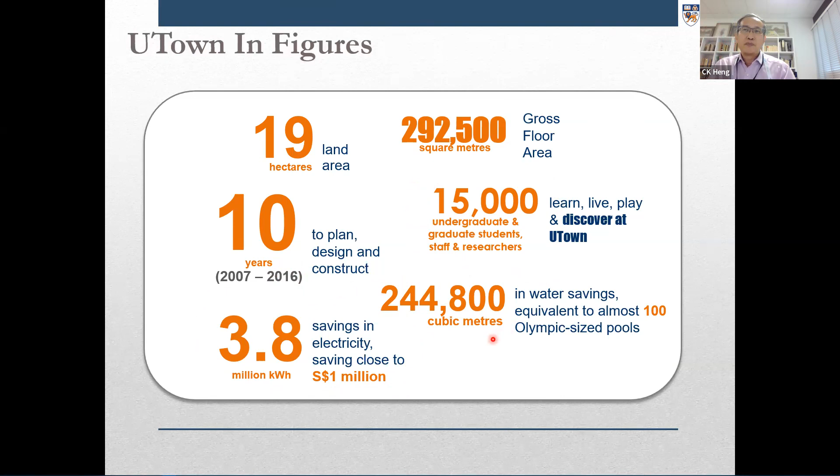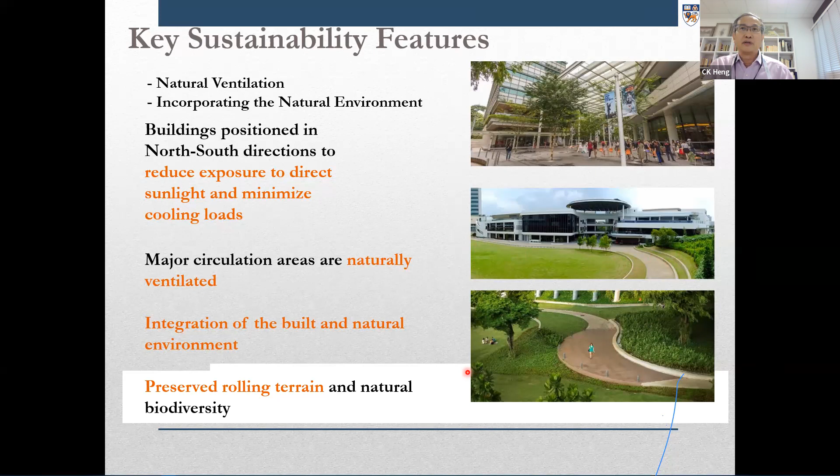So this is the EduSports building here. And we have meters within the residential district hostels here to encourage responsible behavior, such that we have this so-called pay-per-use scheme for air conditioning at the residential colleges.

Let me go back to the photos earlier so you know. All these here are residential colleges - they're hostels. This as well, they're all hostels. The high-rises are hostels, except for this one which is a research building. The rest of the high-rises are all hostels, and the aircon is on a pay-per-use system.

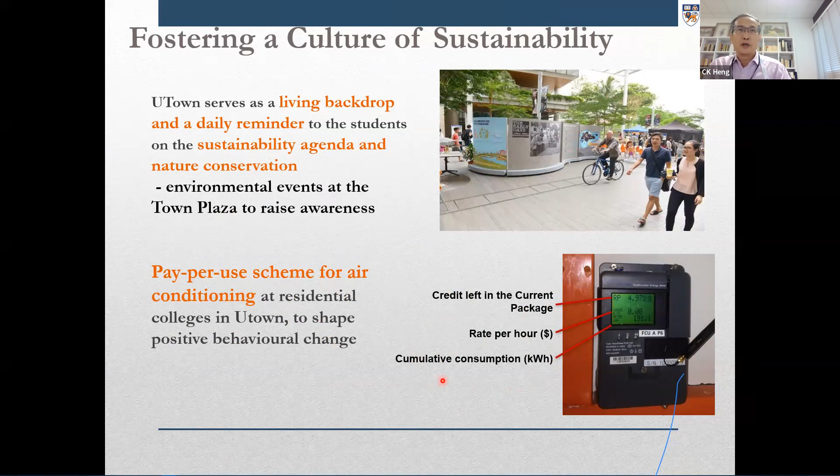So you have a meter that basically shows you the rate per hour and how much consumption has taken place. This is also to promote positive, responsible behavior.

For the entire campus, we are aiming to become a carbon neutral campus by 2030, and a cooler NUS. We intend to do it through energy management and efficiency, using as much renewable energy as possible - I'll show you how we do it later - and also through carbon sequestration and carbon offsets.

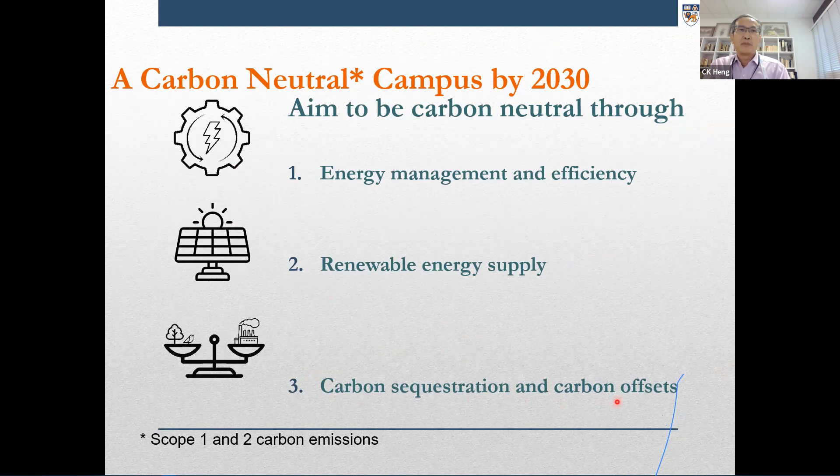What we hope to do is to cool NUS by 4 degrees by 2030. One way of doing it is to reduce solar gain, and again through SDE4 I'll show you how, and reduce heat load generated by the buildings and operations. We're going to plant a lot more trees on campus - right now we're trying to plant about 10,000 trees a year.

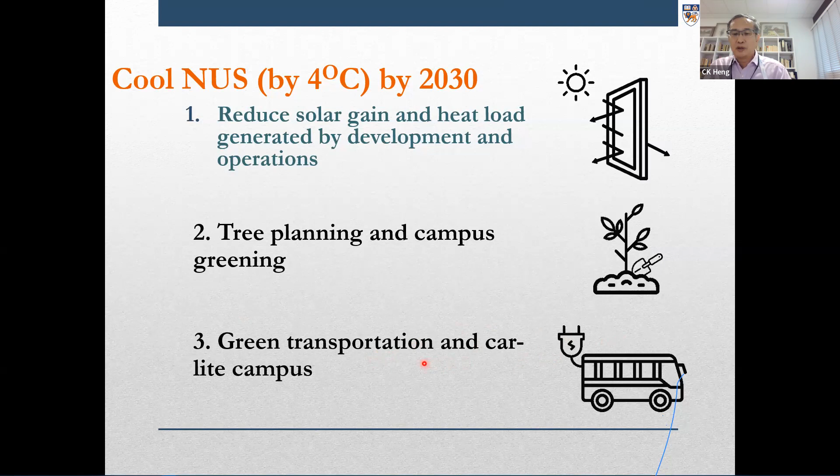For green transportation, right now we are transitioning all to electric buses, and also aiming for a car-light campus, one that doesn't have too many cars. In a nutshell, here are the different initiatives taken to become carbon neutral, to become a cooler NUS, and to have zero waste. I won't go into all of these except to highlight the topics - you can go over all this in the recording.

So we maximize renewable energy use with zero energy or super low energy buildings - I'll show you later what we've done through SDE4 and SDE3. We also have a smart campus ecosystem, with an integrated building management system, etc. A lot of this is to make sure we are carbon neutral. And of course we're also now working on a digital twin.

This is for basically environmental simulations and to optimize the operations of the university.

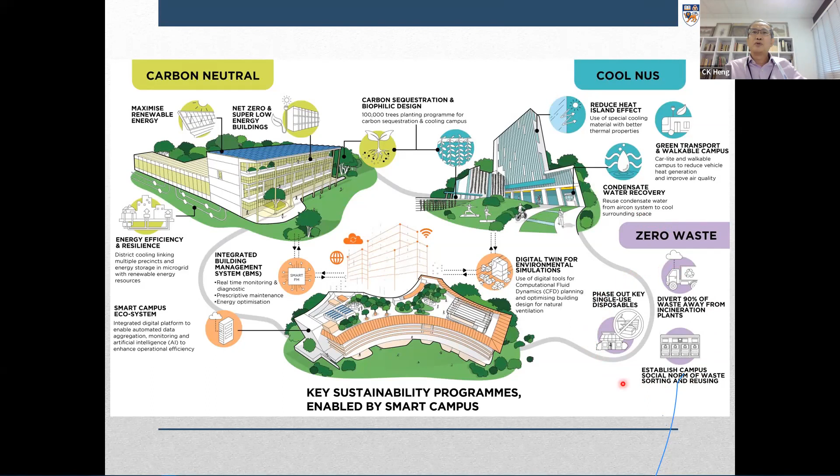We will be, as I said, planting a lot of trees to render NUS cooler and also to reduce the heat island effect. It will make the campus a lot more walkable and less traffic and transport needed. We recover the condensates and we also harvest rainwater. And then of course we do all the zero waste insofar as recycling is concerned. I won't go into this - let me move on to the next slide.

So this is one effort in what is the SDE 3 building, on the rooftop, an early experiment that my colleague conducted. As you can see here, what she did is basically 10 to 15 cm of this planting medium, which is dirt soil, over hydrocell. So there's a thin layer of hydrocell, and then she placed a layer of earth on top.

And just left it there. After a few months, things began to grow. After a couple of years, this is what it is, a stable state. It came to be a steady state where there are local plants, a lot of it because of bird droppings and all that, and it became a stable ecosystem, as you can see here. So these are photos I took on top of this rooftop of this very sustainable kind of greenery. So this greenery, although it looks a little bit wild, it's totally natural.

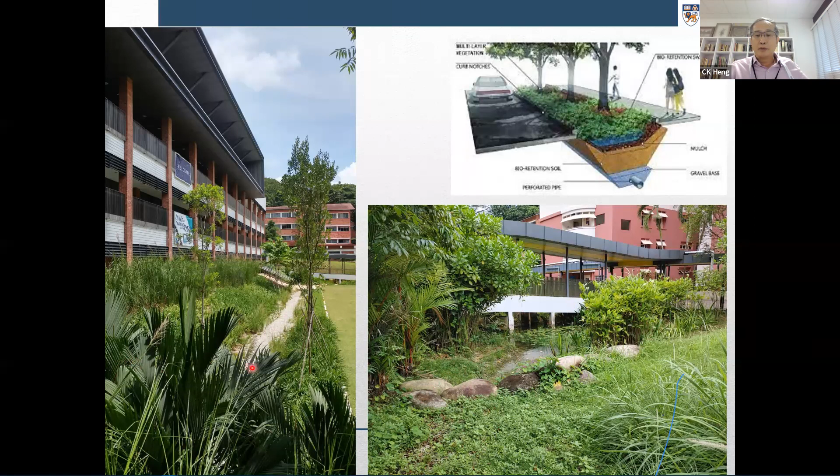So let me move on to the next one. Similarly, at the Yale NUS College, we harvest the rainwater. Again, we retain the terrain. You can see the terrain is a sloping terrain that's part of the U-town that I showed you earlier. And again, we harvest the rain, and it becomes both an aesthetic feature, but also a water resource for irrigation.

As you can see here, we also take good care of our trees. In this building here, instead of chopping down the tree, we conserve the tree, and the building actually avoids the tree, even though this is a rain tree, which is quite common. I won't go into the sustainable development goals here, but just to say that our NUS efforts are totally in line with it.

Next, please let me know if I go too fast. Next, I will talk about our SDE 4, our net zero energy building, which is part of this big agenda of making the campus more sustainable. The groundbreaking of the building was in November 2016, and it was completed in 2019. Let me show you.

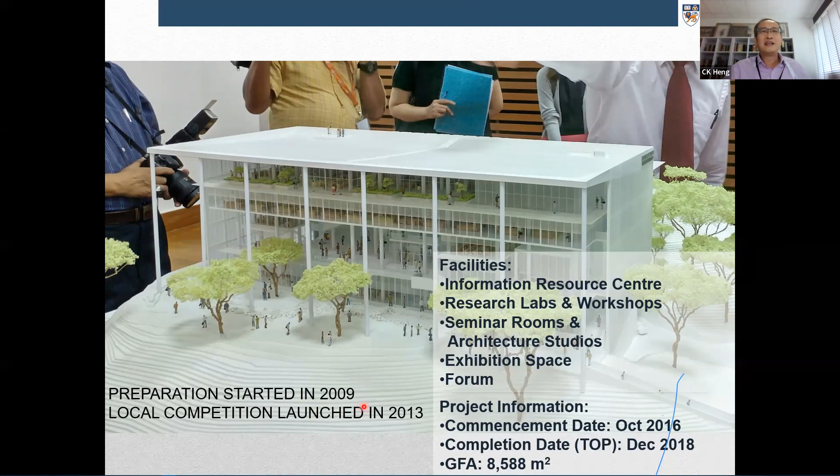I was then still the dean of the school. I put up the proposal, which was accepted by the president of the university, and then they told me to go and raise funding for the building. But if you remember well, 2007, 2008 was a financial crisis, and it was not easy to raise any funding during such a period. Finally, we went ahead to start the building in 2013 with university funding.

So it is the first purpose-built net zero energy building in Singapore, first through design, and then through operations.

And what we have achieved is not only technically a zero energy building, but I think the building is actually also very, very handsome. It's a very beautiful building. Like I said, it's an architecture of delight. So what we're trying to show here is that high performance buildings need not be ugly buildings. It can be biophilic, it can be zero energy, and it can be very comfortable and beautiful.

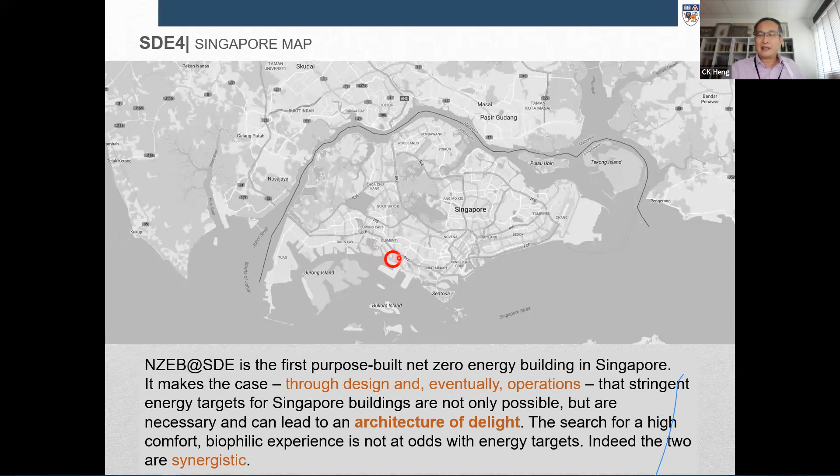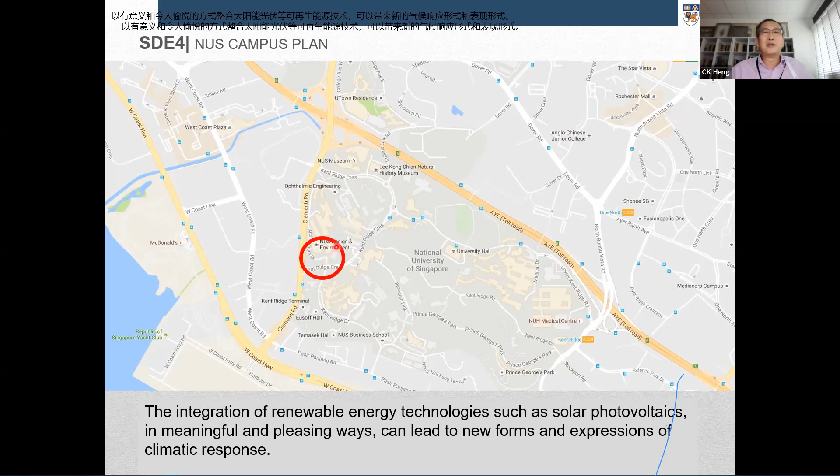I hope you can see the road here. There's a road that comes through here, makes a curve and goes up the slope there. So remember, there's actually this road that goes up, makes a curve, and goes north. So this is where it is. So the road comes in, makes a curve. This is a hill slope, makes a curve here, and hugs the slope and goes to the car park here.

As I mentioned earlier, in here there are design studios, labs, workshops, etc. So I wouldn't go into that. But it is important to see that it is going to be here, and the road that was here will have to be realigned. So what we did is this road, instead of hugging the slope, now goes up there and makes a bend, almost 90 degrees, and goes through these two buildings under a bridge between them. I'll show you later.

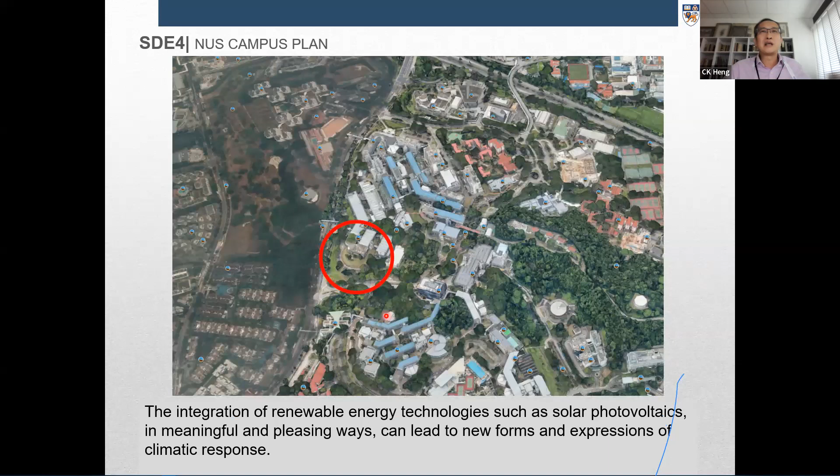And the reason I'm emphasizing this, as you can see in this Google Earth view, is that if you go closely and look at it, you see that this is the road that I was talking about. It actually goes up this slope, and this is rather a huge slope here, and there are a bunch of roadside trees. These trees are along the road, and if you see the next slide, you can see that the trees are still there.

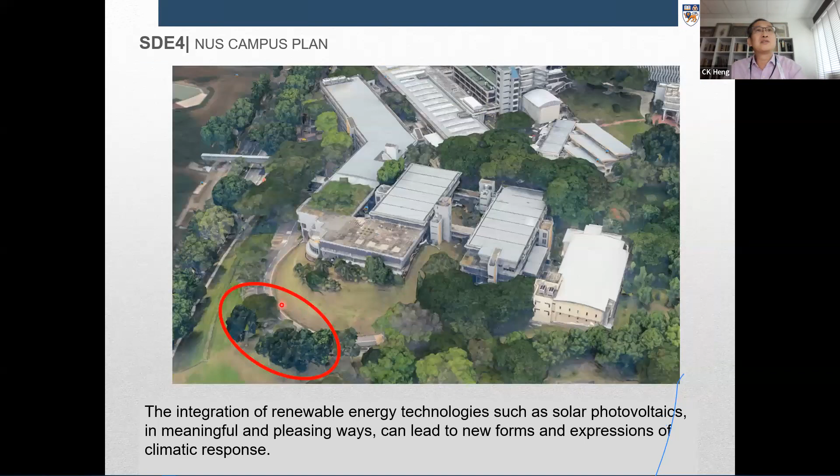Even the roadside tree, this one, which is essentially this tree here, is still there. We did not chop it down. This is another one there. So we kept practically all the trees. Maybe only one tree was removed, maybe this one, but this one was there. So in this entire exercise, we took very good care of the terrain, and we kept almost all the mature trees here.

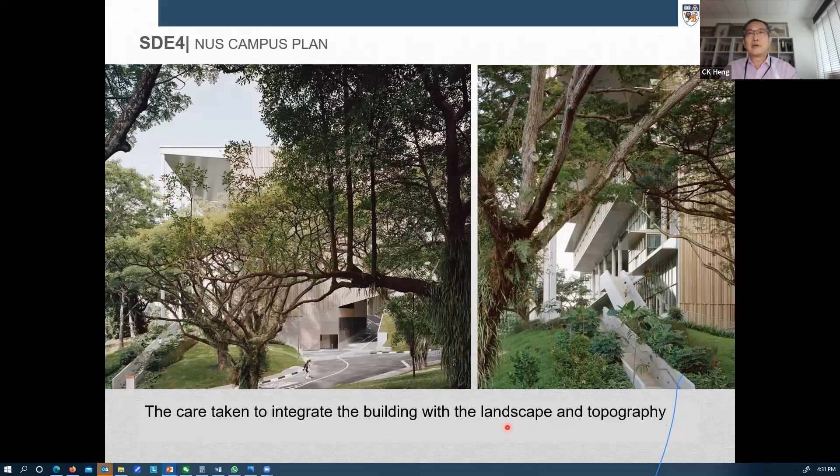We did not chop the trees. There is a lot of carbon sequestered in these trees, and also in the soil and in the roots of the trees, so we took a lot of pains not to destroy them. As I said, it integrates very well with the landscape and topography. So the whole process started with, first of all, a lot of study.

This is a site visit that I conducted with my team to some projects elsewhere, and it starts really with a design brief.

The design brief or program is really important. We spent almost 6 months working on it. We interviewed all our colleagues to understand what they need, worked out all the space requirements and the kind of electricity and load needed to run this building. So we advised them not to bring in refrigerators into the building from the start, and we calculated all the power needed to run this building.

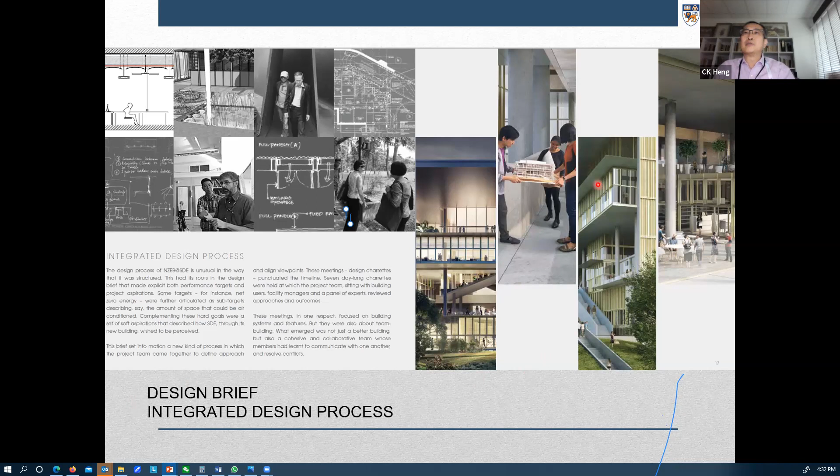So these are some shots of the building. I'll be showing you pictures of before and after. Before is all these renderings and perspectives done by our architect and the multidisciplinary team, and then I'll also show you the after, which is when it's built.

I think it's important to show that what we have done is a contemporary view of tropicality. We take climate responsive design to the next level. This building encapsulates all the principles of passive design strategies, the principles of traditional vernacular tropical architecture, but expressed in a new form. It also adopts an innovative solution to the question of thermal comfort, and I'll show you what that is.

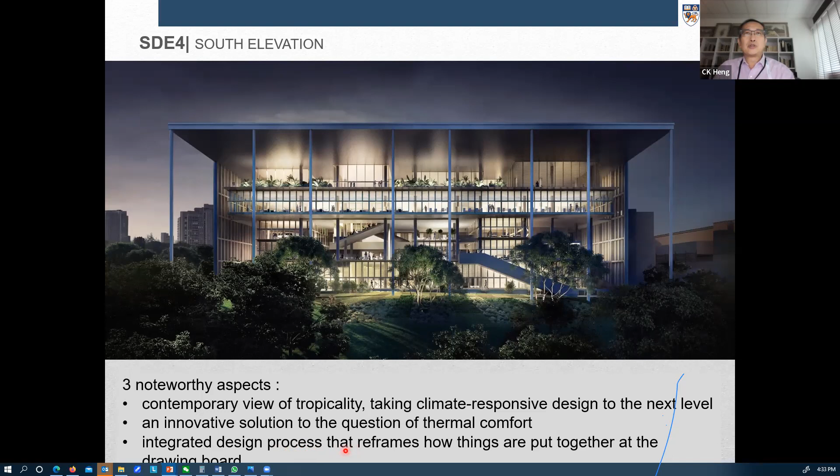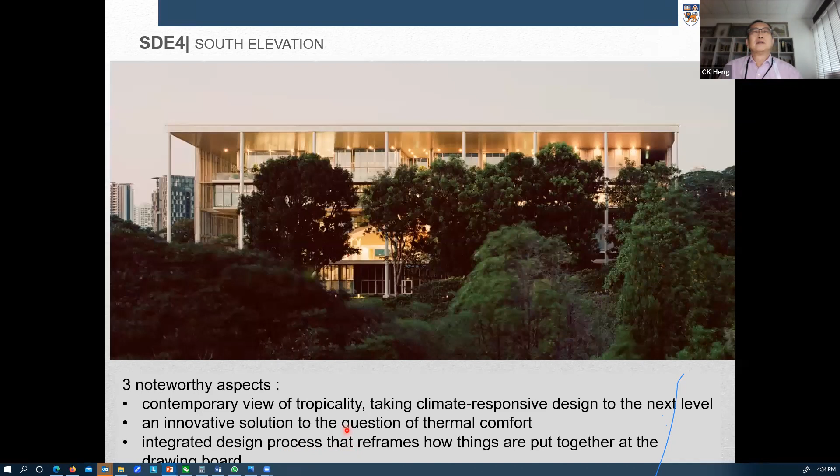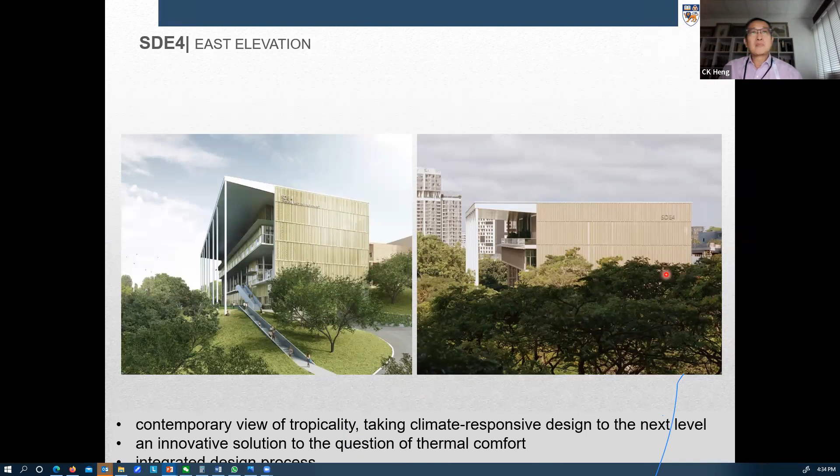The entire integrated design process is very important in making sure we achieve a good outcome. So this is before and this is after. And this is a rendering, and this is after. And this is a section of the building.

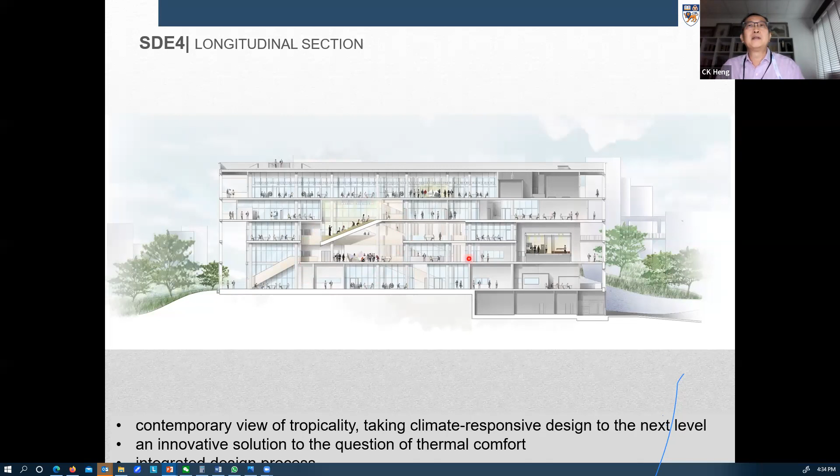You can see there's one big space here, a big void. I'll show you in the plan, but before that, let's see what the climatic design is that makes this a climate responsive architecture.

Instead of having just a block, the block is chiseled out so that it's almost like drawers. In between these drawers or boxes, some in, some out, you can ventilate it. So there's a very large space here which is naturally ventilated.

Then over and above this whole stack of space is a huge over-sailing roof. The huge roof basically shelters the building from the sun on all three sides, east, west, and south especially.

And the eastern sun and western sun are again shielded off by these screens, so that at the two tail ends, east and west, you have these screens.

On this very huge roof, you can collect the rainwater, which comes down and becomes naturally cleansed by phytoremediation, through a little streamlet into a little pond. The water is used to irrigate the gardens here, and the rainwater is also used to flush toilets, etc.

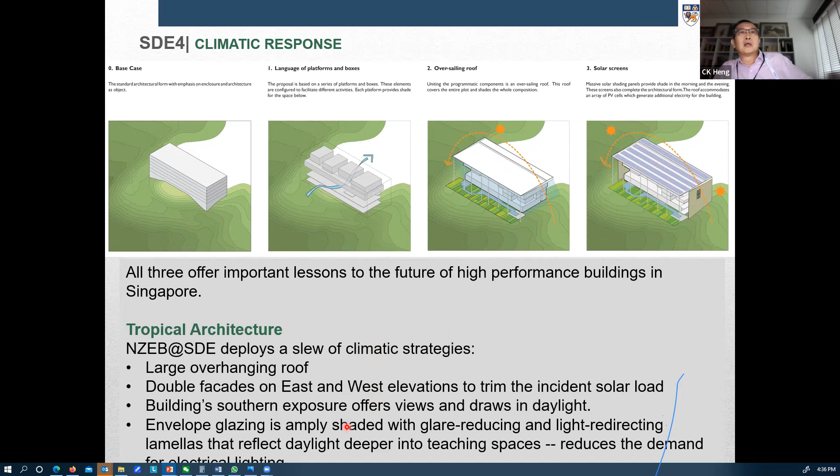Let me move on to the next slide. You'll see here the two screens at the end of the building, which are almost like this — it's almost as if you're holding an umbrella against the sun on the east and on the west, basically shading the building from direct thermal load. So these screens actually protect against the eastern and western sun.

As you can see, the building is basically served by these concourse spaces, wrapped around by circulation spaces, both horizontal and vertical, and all these spaces are naturally ventilated. All these orange colored spaces are naturally ventilated. This is the only enclosed space — the only space which is cooled in a hybrid manner. There is a forum here.

You will see here the forum, which is basically a very small auditorium, marking a huge foyer space, and the foyer space is naturally ventilated. Both on the top floor, the 6th floor, we have a linear garden, and also on the 1st story.

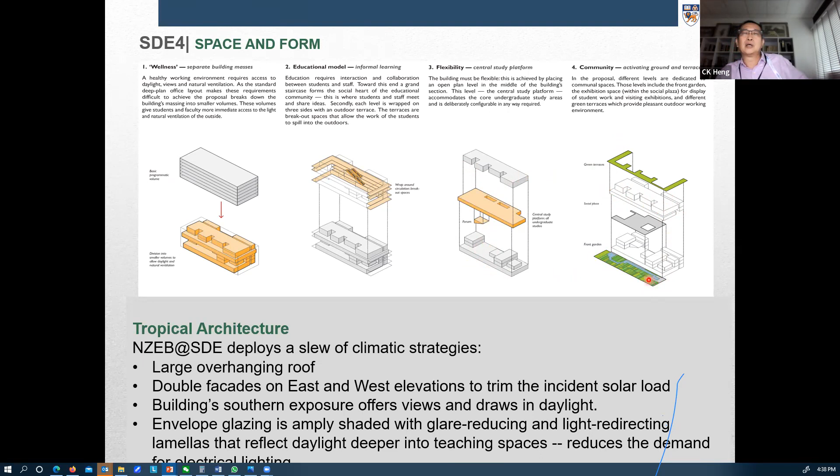Actually on the 2nd story as well — because we have a landscape program, our School of Design and Environment, now College of Design and Engineering, we have a landscape program, and our students work on this garden here. So let me now move on, and you can see here now.

And you can see here, all these are actually naturally ventilated with a big atrium.

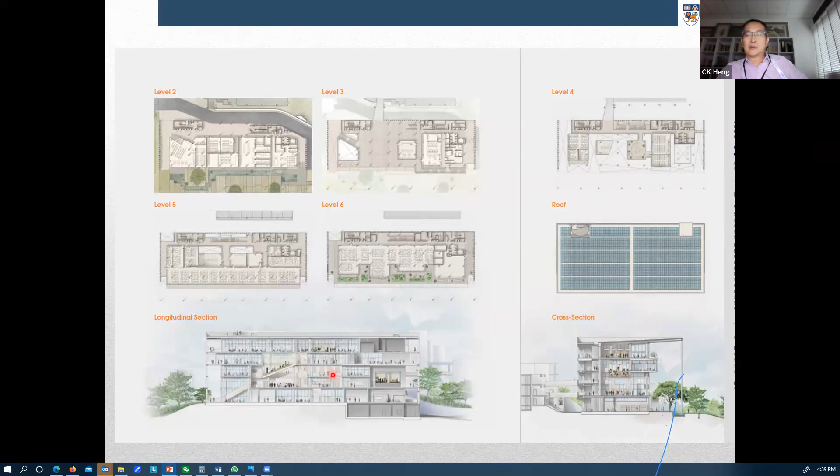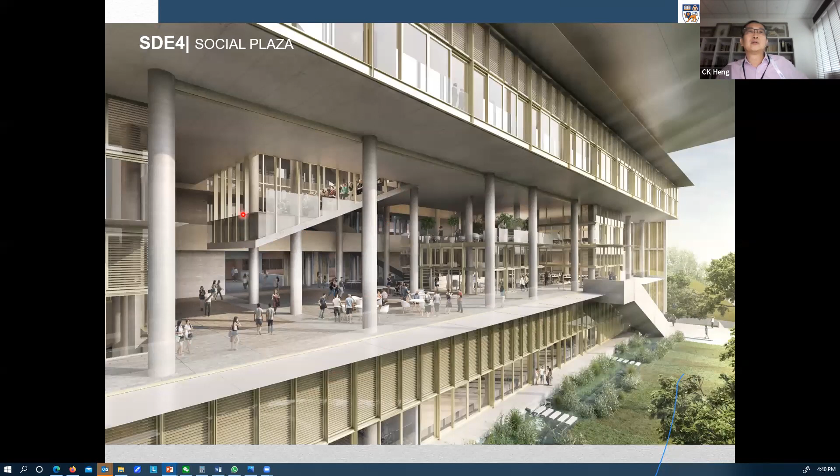Let me show you here. As you can see, this is before, and this is what it is today. This is the little auditorium, a forum. And the same space now on the 2nd floor, looking down.

This used to be the cafe, but because of COVID-19, we didn't come to school for 2 years, and this cafe was a natural victim of COVID-19. Otherwise you'll see a lot of people eating here, and sometimes staff and students having classes there. This was during the open house just a few days ago, where we showed what our staff and students do to the new batch of students applying for the program.

Give me a second. And then next, so this is the same space, with all of our students.

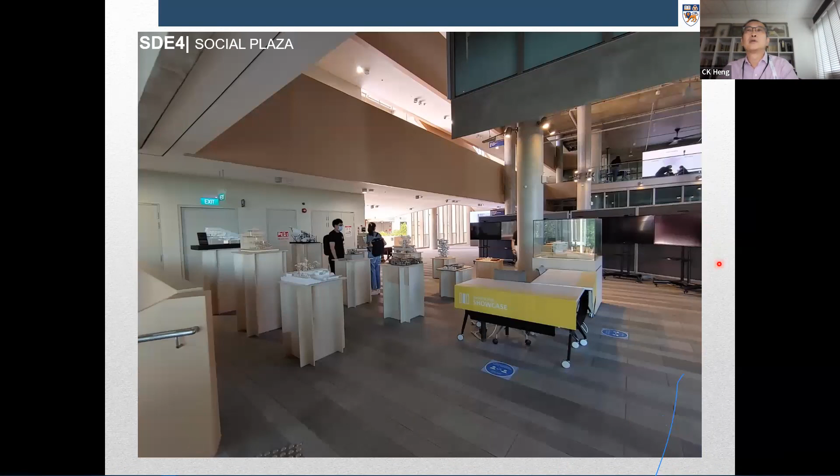Much like our traditional veranda, all the principles that you have in vernacular architecture are basically adopted in this building.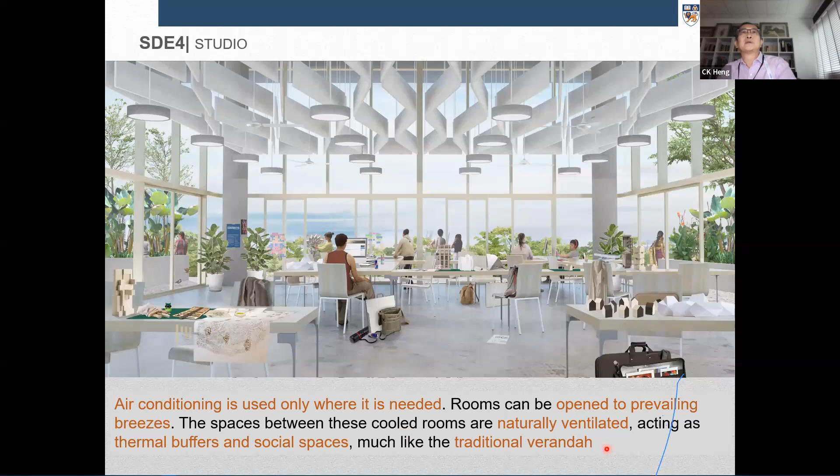So this is what it is today. You can see the fans there. All these are smart fans. They are activated only when there are people in there; otherwise they basically go to sleep, and they save a lot of electricity.

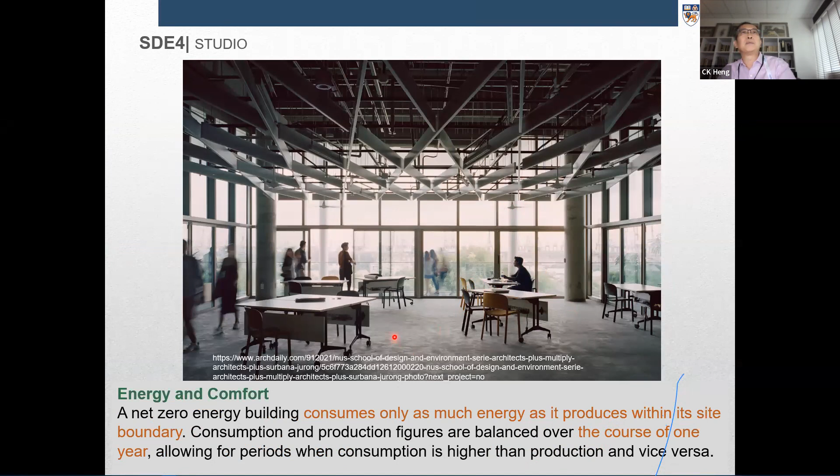So this is another view. Against this column you'll find a little meter that shows you the temperature, and the temperature is usually about 26 point something degrees, between 26 and 27 degrees, with humidity about 65%.

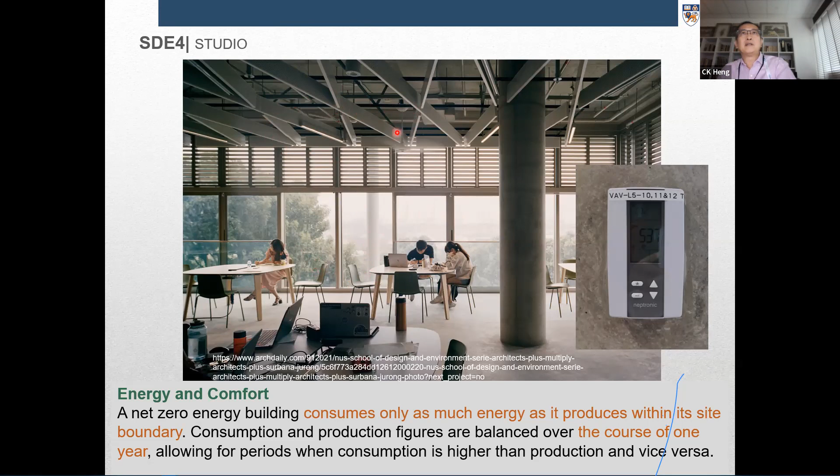So the good thing about this is that with air temperature delivered at about 26 to 27 degrees, we basically do not need to recycle the air anymore. We can open the windows, we can open the door. There's positive pressure here, so the air will just leak out into the surroundings, but it's air at 26, 27 degrees, so it's no big deal. And then the smart fans actually make it very comfortable.

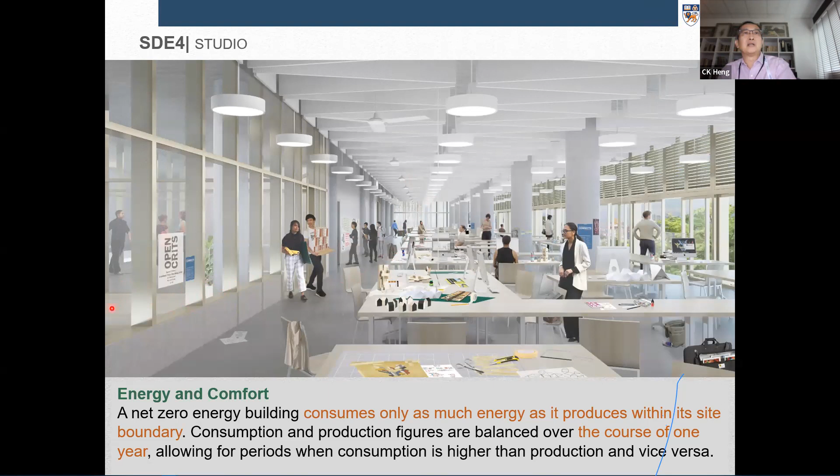You can see here another scene. From here you can actually see the theater or the amphitheater. So this is a real actual space, and you can see all this sun shading here, and you could also have further sunshades if needed.

Let me show you. So this is the array of solar panels on top of the roof, connected to the grid. The electricity generated is fed to the grid, and on a rainy day it will draw electricity from the grid instead. After all these years of operation, we found that 9 months of operation using this is enough to run the building for a whole year. So we are actually energy positive by a wide margin.

So let me show you how we do this. There are several iterations. We start with a reference building - a reference building of this sort will need about this much energy for a year. We started with optimizing the envelope, and we reduced it from 1947 to 1602.

We then looked for a highly efficient air conditioning system, which further reduced it to 1200. That was still too high, so we chose to use a hybrid system - a very high efficiency air conditioning system combined with fans, so we deliver air at a much higher temperature. That further reduced it to 820. Then we optimized our design further with detailed energy simulations, bringing it down to 497.

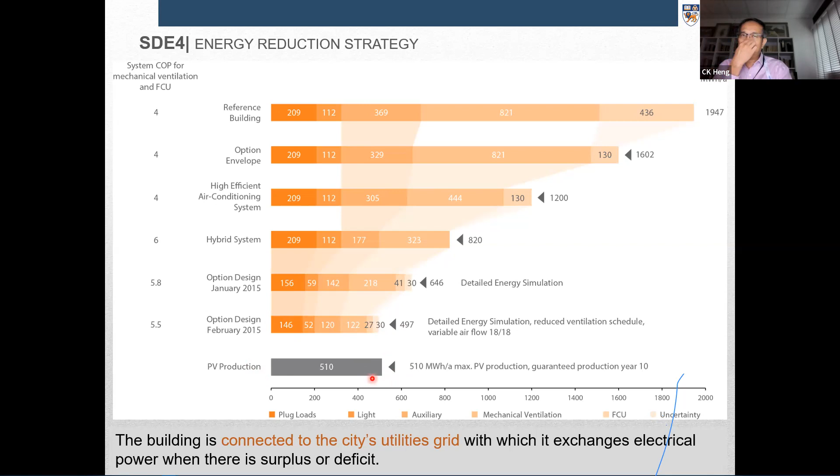And with all the solar panels you see, we could deliver 510. So once we arrived at this, we knew we could do it, and we proceeded with building the building. Let me get into more details now.

So we have finally, after several simulations, decided to have an overhang of 1.8 meters, with sun shading at 15 degrees. We can open it for natural ventilation and have internal screens if necessary to reduce glare, and as I said, have ceiling fans and a mechanical ventilation system that delivers air at about 26 to 27 degrees.

I won't go into these details, but you'll be able to see it in the recording.

What's important here is, instead of traditional air conditioning, which is really the biggest consumer of electricity, we opted for an innovative hybrid cooling system that supplies our rooms with not only cool air, but always fresh air. We don't recycle the air. The air comes in at 26 to 27 degrees.

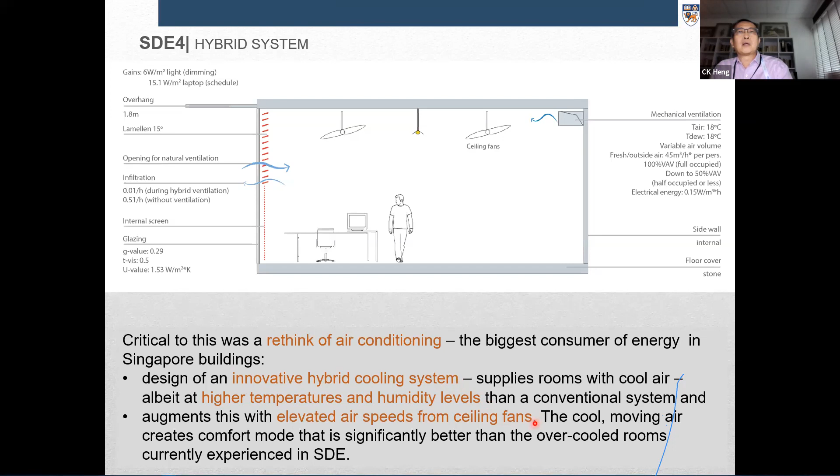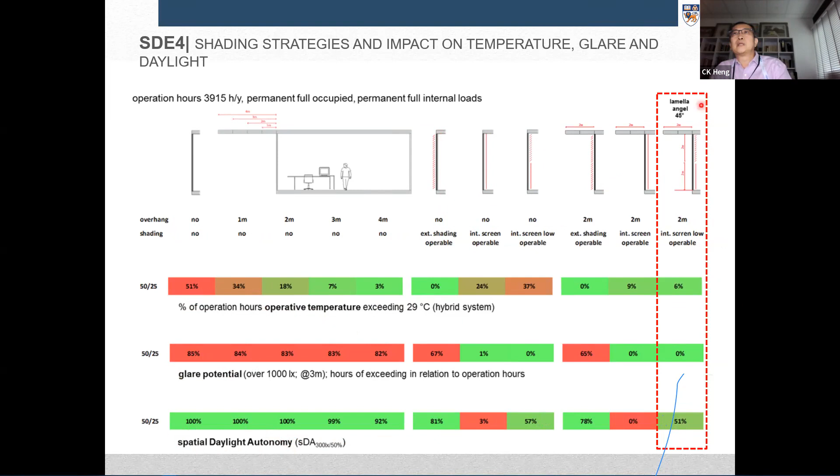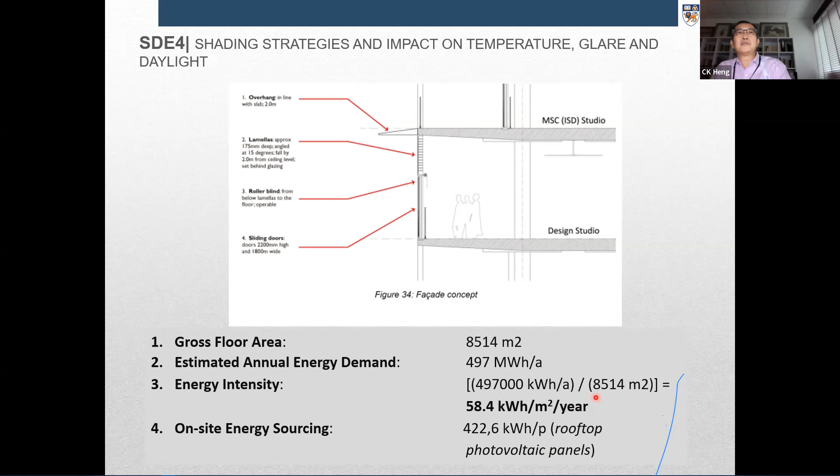So finally we selected this option here, and that's the one you see. These are all the figures you can go through at your own time.

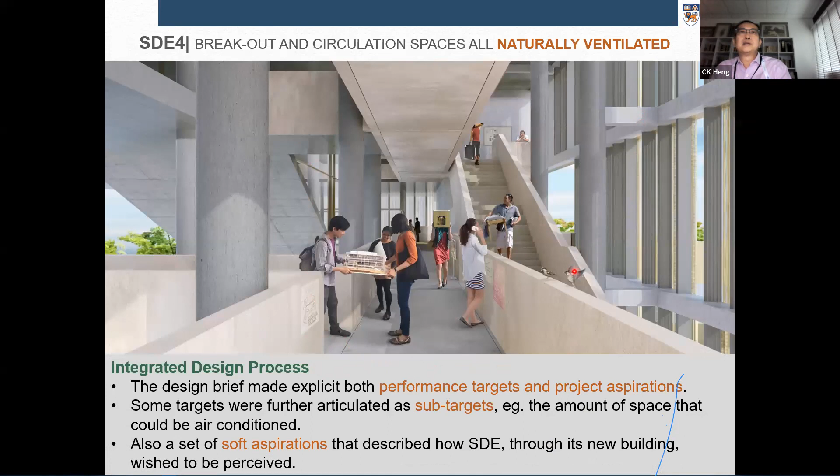You can see this was, as I said, really all your buffer space, totally naturally ventilated, no air conditioning, before and after.

And this is the IRC. It's also a large space, and instead of those small smart fans, we use one huge big-ass fan here.

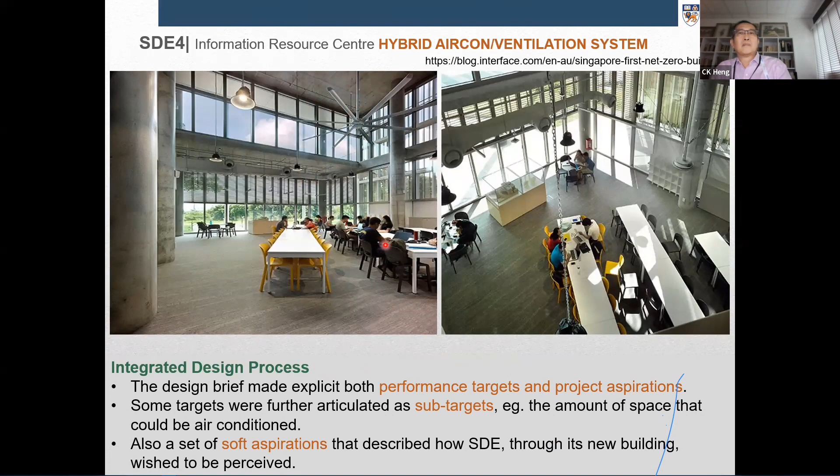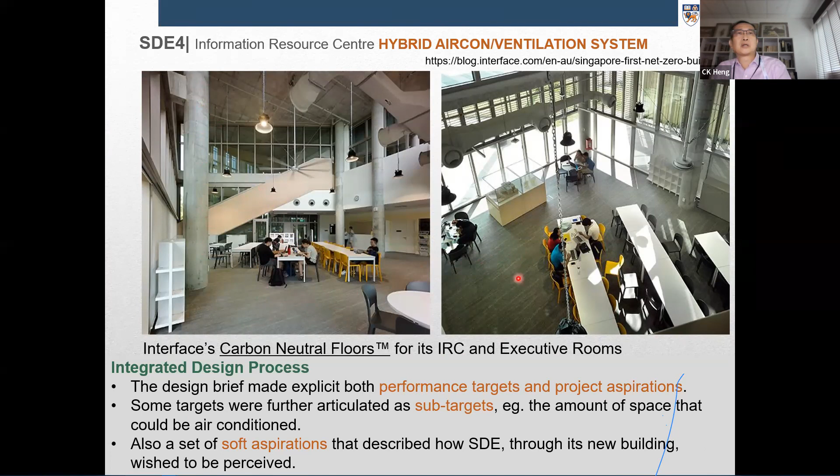And we use carbon neutral floors using recycled material. As you can see, it's actually a low cost building. All the material is concrete with screed, except for certain areas where we use carbon neutral floors made of timber, but otherwise everything is screed.

The process is so important. We have several design charrettes between our staff and the designers and the multidisciplinary team.

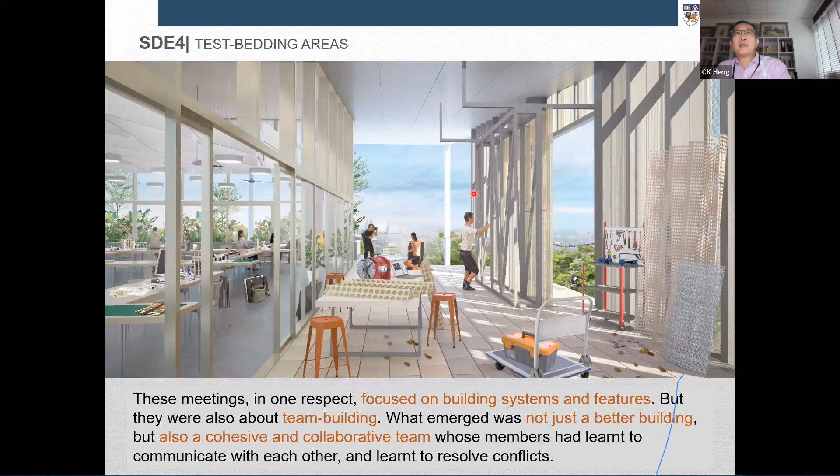So I was saying just now, look at the screen, the square hole in it. This is what it is - you can slide out and pull out that part of the screen and replace it with elements you want to test. Our staff would pull this out, replace it with facade systems they want to test, then slide it back, do the test, and take measurements over a period of time.

So there are two such test spots, one on the eastern side and the other on the western side.

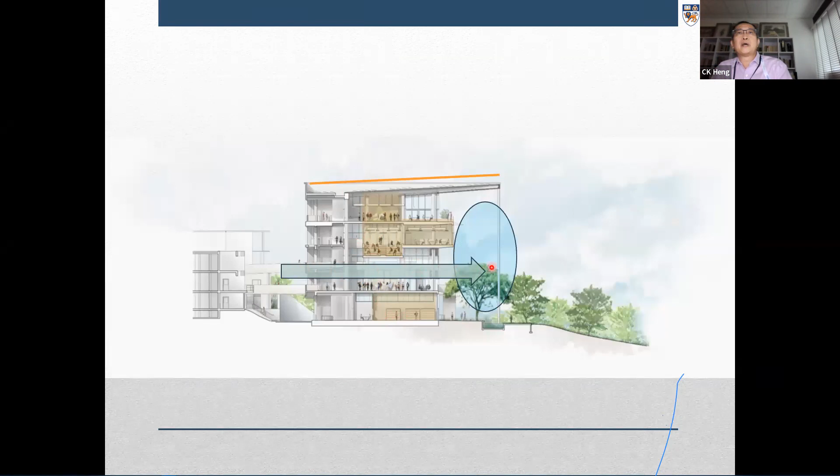More pictures of the interior, and here this is where the space is - this is where the big atrium is, and that's where the breeze can come and go through. As I was showing you just now, this space here is really what it is.

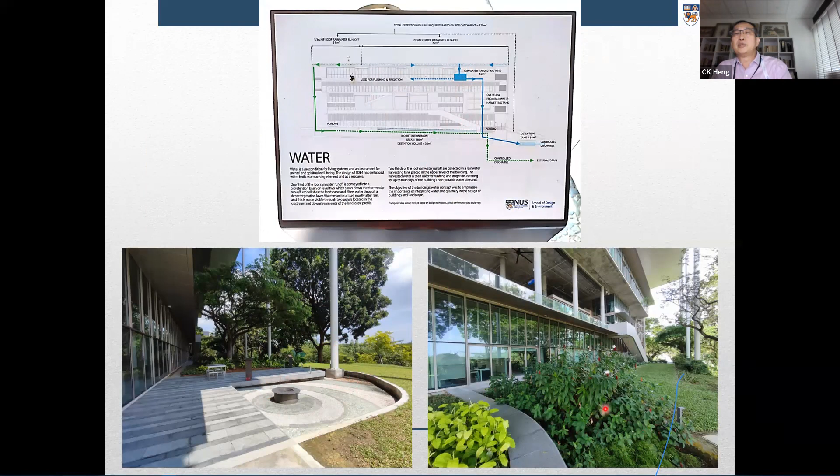You can see that we harvest rainwater, and there are over 50 cubic meters of water being stored there. The rest can also be fed into this pond, and it will go through a system of bioremediation into another holding pond. So these are again the details of the building, which I won't go into.

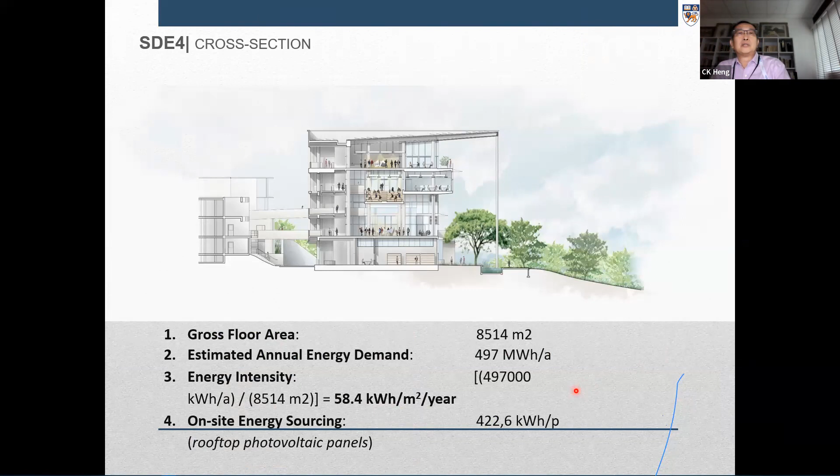Again, this is just to finish off with this building. Let me now quickly talk about SDE 1 and 3.

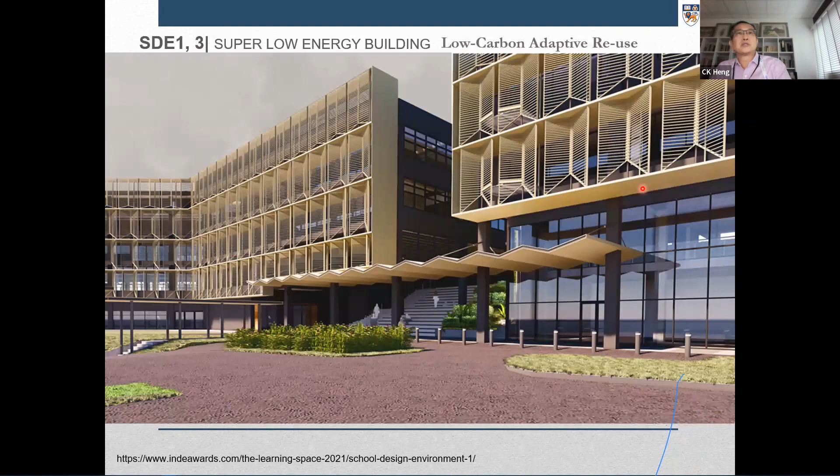So this is SDE 3, which is just next to SDE 1 after renovation. This is a rendering of SDE 3 and SDE 1. This is built - when it's built, this is what it looks like today.

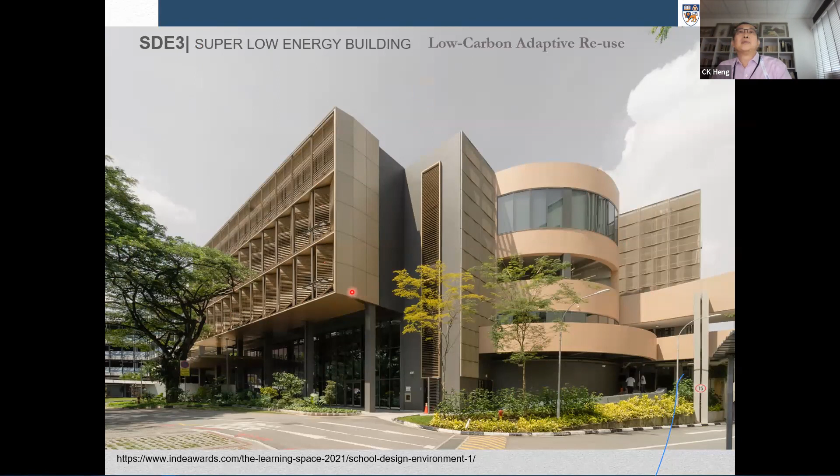It's the renovation of an old building, but it takes a lot of elements from the previous building, and this is what it looks like today. By not demolishing the building, we bank the carbon in here, saving a lot of carbon and also saving the memories. We basically conserved the building, renovated it, and made it into a super low energy building.

Our definition for a super low energy building is that it's at least 60% more efficient than a business as usual building. So this is another picture of it.

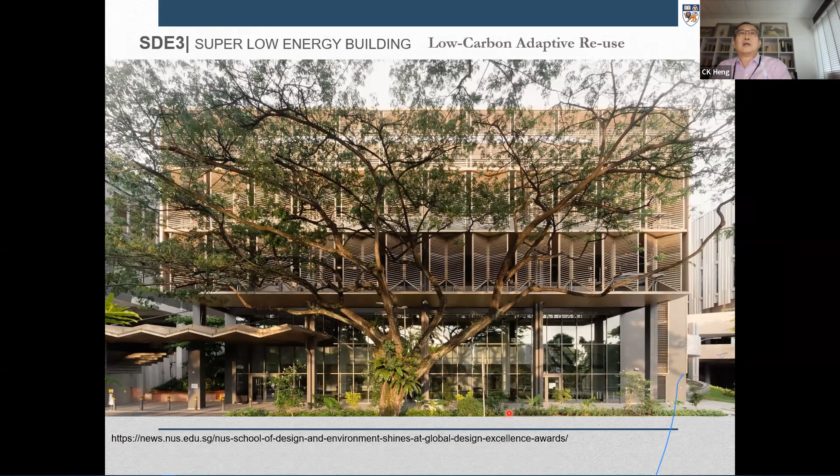Remember I was telling you about our experiment on the roof - this is the experiment our staff did years ago. This is what she has done now for the internal courtyard of this building. All the plants selected are local plants highly resistant to drought, so this is basically a garden that needs hardly any upkeep.

So this is basically a garden that needs hardly any upkeep. Okay, I'll stop here. Thank you very much for your attention. I'll be happy to take some questions, but I realize I've taken more time than I really intended to.

I can probably take one more question and I've got to run. Is there any question for Professor Heng? I see Tiffany. Good afternoon, Mr. Heng. My name is Ruth, I'm an architecture student in Petra. Thank you so much for sharing about this wonderful building.

So, while designing this net zero building, is there any facility designed specially for disabled people? For disabled people, yes. We don't have ramps here, but we have lifts. We have 2 lifts, at the 2 ends of the building.

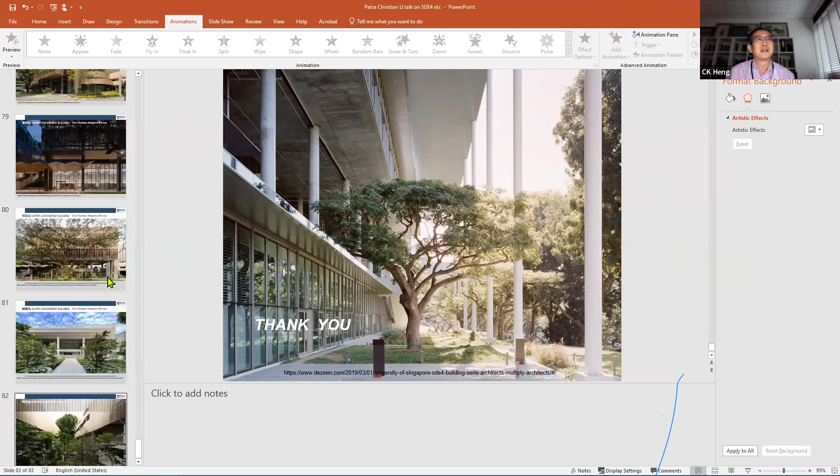Let me see whether I can show you. There are 2 ends of the building. Can you see? At the ends of the building, there's one here and one here. What is interesting, of course, is that these are big enough for wheelchairs and all that, and once you get into this, it's barrier free.

We designed the building such that we conceal the lifts, because we really want our students and colleagues to take the staircase instead. So the staircase is very obvious, everybody can see it, but the lifts are actually hidden away behind doors. That's what we do. I don't know whether I've answered your question.

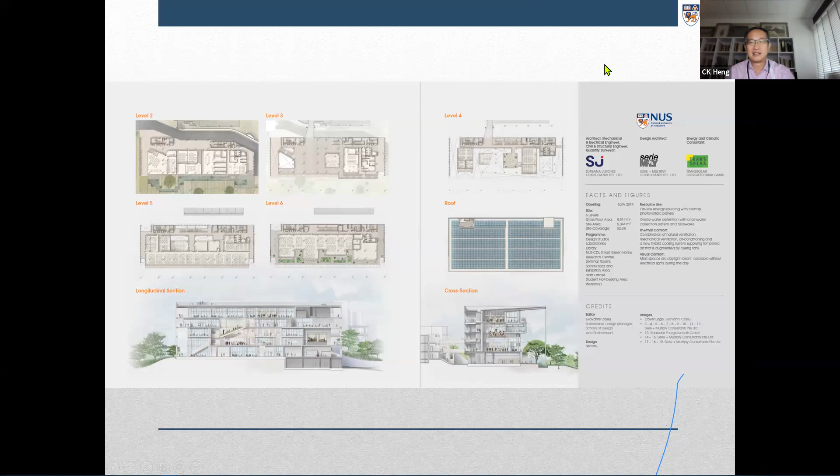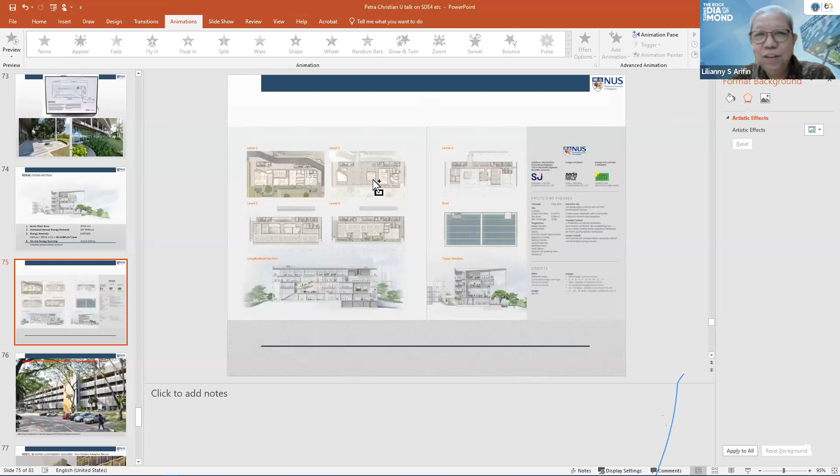Yeah, it's interesting, thank you Mr. Heng. Okay, thank you Ruth. I think we are running out of time because Professor Heng Chye Kiang is very busy with another meeting, and we missed the time difference between Singapore. Yes, I'm sorry, I didn't realize.

Professor Heng, for your sharing, it's really inspiring us as designers and architects, how we achieve sustainable living for all human creation on earth. We have to start from ourselves, and also how we appreciate climate, culture, biodiversity. I love that energy is not just about saving electricity, energy efficiency, but more than that. Maybe someday we can have a more detailed discussion with Professor Heng, but anyway we have to stop here.